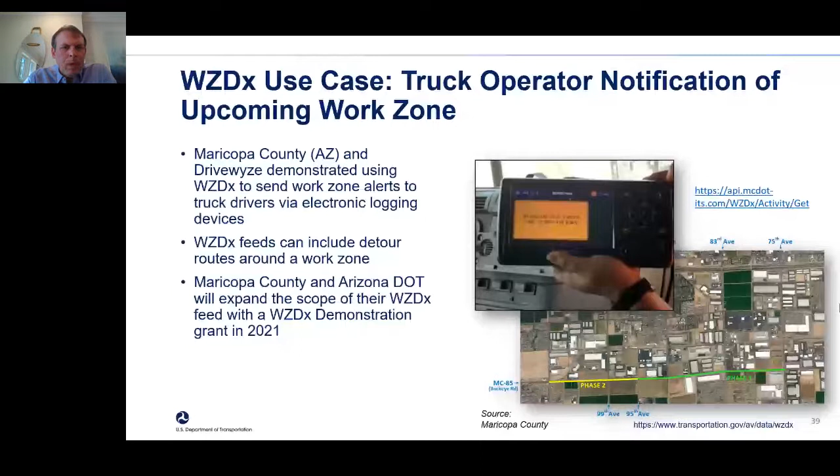And then I also wanted to talk briefly about an open source tool. You may have heard about it from other folks that was funded by Federal Highway to basically automatically generate WZDx data feeds in a work zone. You input some basic information by drawing a line in Google Maps using the tool, or Azure Maps. And then either with an Android device or a GPS-enabled laptop, you drive through it. It automatically snaps the work zone to the map and generates a WZDx feed as well as a roadside safety message feed for those work zones.

It's currently in testing by a bunch of different states. And we look forward to kind of wider spread deployment of that as an easy way to get your WZDx, more real-time data out there in the world. Next slide, please. All right, and this is my second to last slide.

So I urge you to get involved if you're not already. You can join the Work Zone Data Working Group. We have a semi-annual meeting. Obviously, we meet twice a year. It's on November 2nd, so in a couple weeks, from noon to 2:30 Eastern, where we kind of review what the latest progress of each of the working groups is and kind of plan the next 6 to 9 months. Send me an email, I'm avdx@dot.gov. You can join one of those 5 working groups.

If you have a specific interest in one or more of those areas that I mentioned, or you're interested in kind of starting a new area of related work, we're open. You know, this is a community-driven effort. This is not a USDOT-driven effort, and so we encourage you to kind of step in and participate as you will. You're the ones who kind of do the work and keep this going. And we encourage you to get on the GitHub site, which is where all of the specific development of the spec happens. Ask questions, submit an issue, something you'd like to see changed or added to the spec, and share your knowledge with the community.

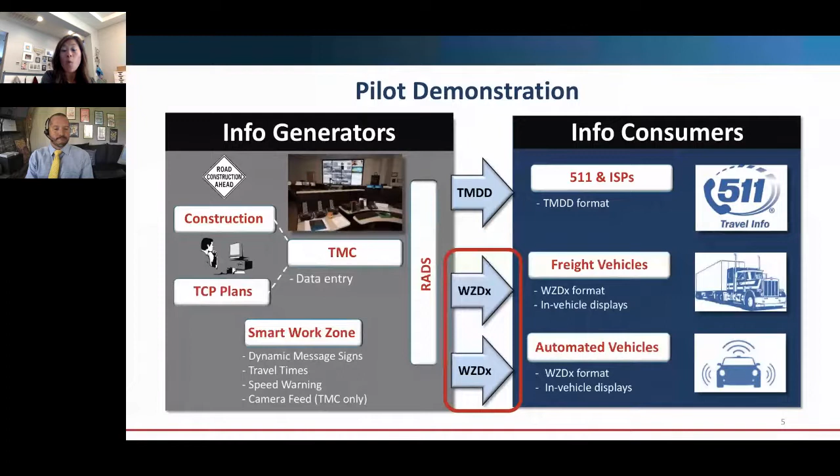We really think that data is very valuable and something that only the local agencies and the state agencies can provide, and is not available to the bigger companies like Google or Waze. So we definitely have a lot of value in that information. So we accept it in all forms, and we didn't want these agencies to have to change their processes because they honestly probably didn't have the resources to do that. And we didn't want to push a certain application.

So throughout, you'll just hear us talk about accepting any data we can and work with it as best as we can. We process it through our regional archive data system, RADS, that's backed by our AZTech partnership. So that's a really key component as we move forward with our work zone data exchange program and projects.

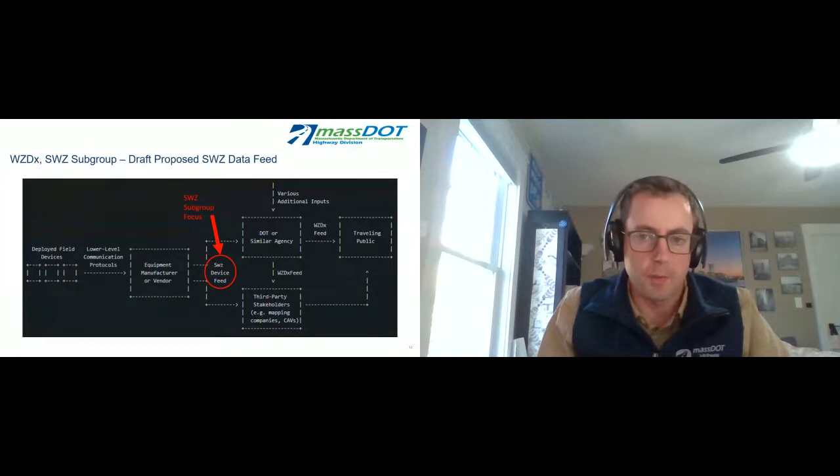So where do we stand right now? This is just a quick milestone timeline. So we started back in July 2021. This is when we presented MassDOT's existing Smart Work Zone API to the subgroup members, and we got lots of feedback from them, and we got a lot of good recommendations. So we started implementing these recommendations back in August of 2021, and then continued to work with subgroup members to iron out some issues in September.

And right now, in mid-October at this point, we're doing a QA/QC of the new API, and actually beginning discussions of how we're going to incorporate the new specification into the existing Work Zone Data Exchange specification. And in November, we have to do a big update at the semi-annual Work Zone Data Working Group meeting. And then finally, in December 2021, we hope to kick off round 2.

So speaking of round 2, which kicks off in December 2021, we're not able to cover everything in the first go around. We only had those 7 devices that we were able to get API specifications for. So there's much more to do. So here's just a short list of a few of the items that were not addressed in the first go around that we hope to approach in the second go around.

So we are always looking for more input. If you have any ideas or recommendations, we'd love to hear them and have you join our subgroup. So if there's any interest, you can just email Nate or Michelle. Michelle's from IBI Group, which is the group that's helping us write the specification. You can just email one of those two, and we're happy to get you aboard.

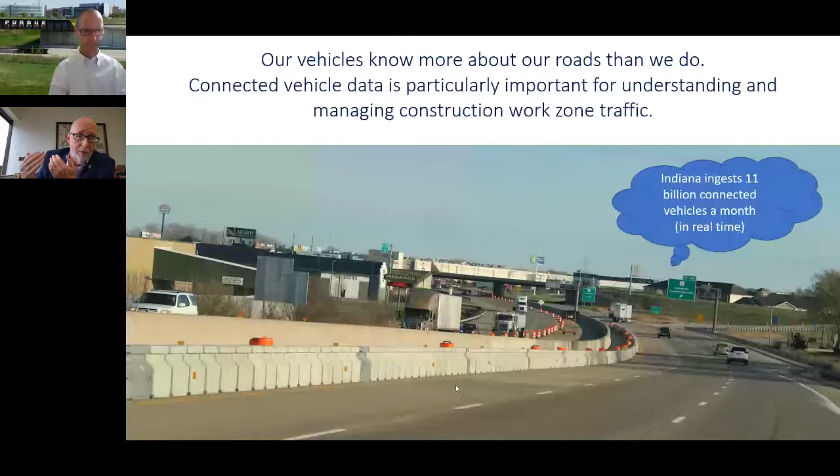And the idea of a queue truck is to have a vehicle that, again, moves with the queue as it shrinks or grows. We actually put them out in Indiana in pairs so that they can leapfrog one another as traffic changes and there's no one backing up on the shoulder. But they are manned with an attenuator. They're manned with specific, special, bright paint and strobes and lighting, unlike other warning devices that are out there. They can be seen on a flat road.

They can be seen. I swear to you, I talked to somebody in Darcy today who said they came on one of these jobs just over the weekend and they saw it about 5 miles away. So they are very effective in catching the eye and in getting the driver engaged, which, as we know, is a continual problem in just engaging the alertness of the driver.

Excellent context, Richard. And I think Richard kind of highlighted message boards, warning signs, but they have a really good strobe package on it. So Richard, I don't doubt that 5 miles. I've driven I-70 a lot lately, and some of those peaks and valleys, you can really see it a lot.

And then the other, we'll jump a little bit ahead to this, but we've actually broadened. Initially, we were just using the Haas Alert for injecting digital alerts into Waze and so on, but we've actually broadened the participation. iCones has a system, and there's a couple others out there. So I'll dive in a little bit more detail on that. So the topics and the motivation that we're gonna talk through is I'm gonna show you some examples.

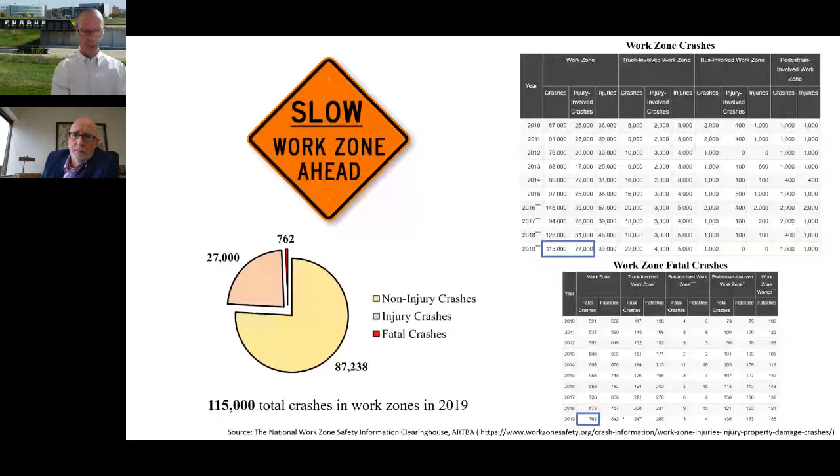Just for context, in terms of work zone crashes, I don't have 2020 data, and 2020 data probably will be a little squirrely, but we have somewhere north of 100,000 crashes a year in work zones, and somewhere north of 700 fatal crashes. And a large proportion of those involve not just the workers in the work zone, but the traveling public. And that's the message that Richard alluded to at the beginning of the talk with Governor Holcomb and Commissioner McGuinness, saying, let's come together and work together to improve the safety on Indiana highways.

And when you start looking at crashes in work zones, the insurance industry has known this correlation between hard braking and crashes for a number of years. That's why you're starting to see many of the insurance providers give people credit for putting in these dongles in their vehicles that monitor their driving habits.

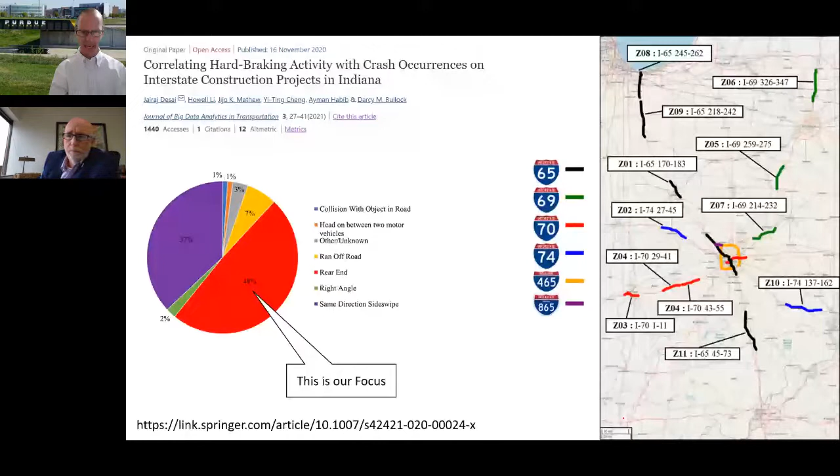But we looked at the rear end collisions in work zones in 2019, and we said, hey, can we do something to provide some advanced warning approaching a queue to a work zone, so that we don't get in that situation of real hard braking, as Richard said, that driver inattention. We got to wake the driver up. Interstates, particularly rural sections, can be a challenging section to keep drivers engaged.

Tennessee has been a very strong thought leader in this space, and if anybody's on the line from Tennessee, I just want to tell you guys thank you, because I think you inspired some incredible efforts that we Indiana colleagues have come along and adopted.

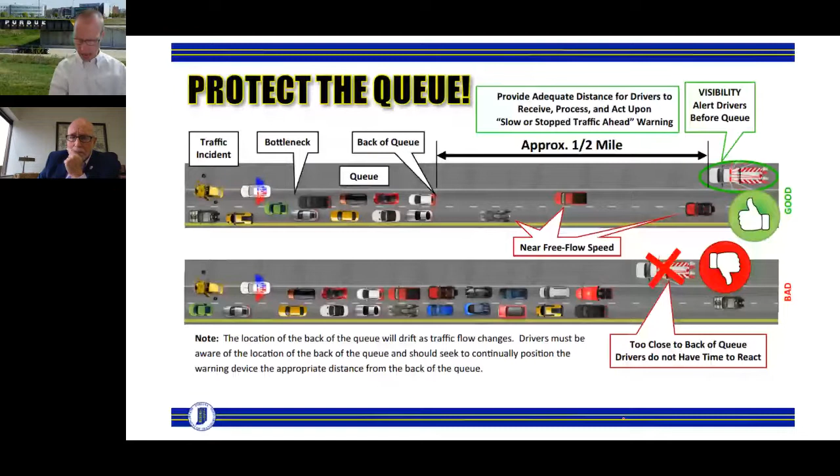So when we start looking at the work zones out there, I'm going to share with you specifics about the I-65 construction work zone. This area is nominally halfway between Chicago and Indianapolis. It's in the greater Lebanon area, if anybody's familiar with that.

Not really terribly important in terms of geographic area, other than we're in somewhat of a suburban rural area where there's an opportunity for somewhat inattentive driving. And I'm going to show you a 10-mile stretch from mile marker 130 to 150. Actually, it's the southbound direction, so mile marker 150 to 130. So this is two 10-mile sections, or 20 miles.

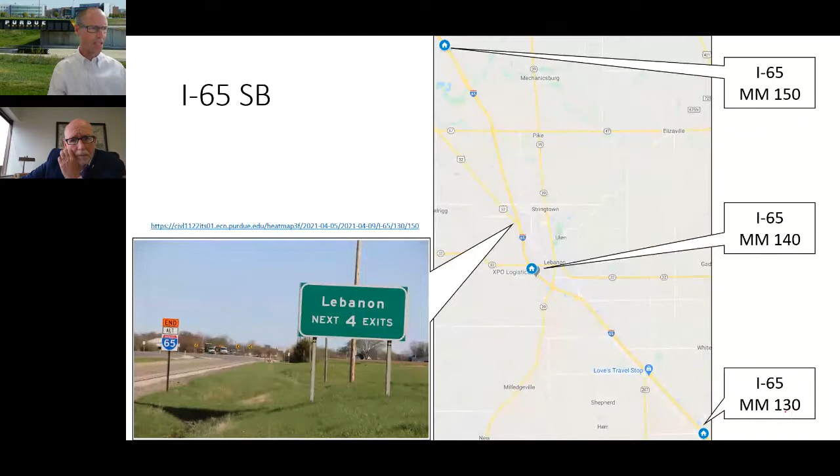And again, I don't need to tell this audience mile markers, but Richard and I share this talk many times with the general public, just reminding them where they are. And I'm going to call out the mile markers. This is 145.8, approaching the work zone. You can see some of the orange barrels. And you can see as we're getting into the work zone, this is actually just prior to queuing starting, but you can kind of see that this is an area where there is going to be some congestion and some queuing.

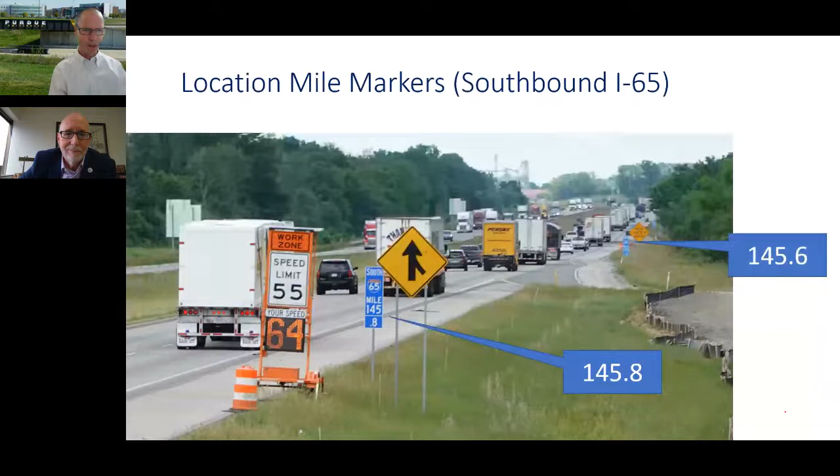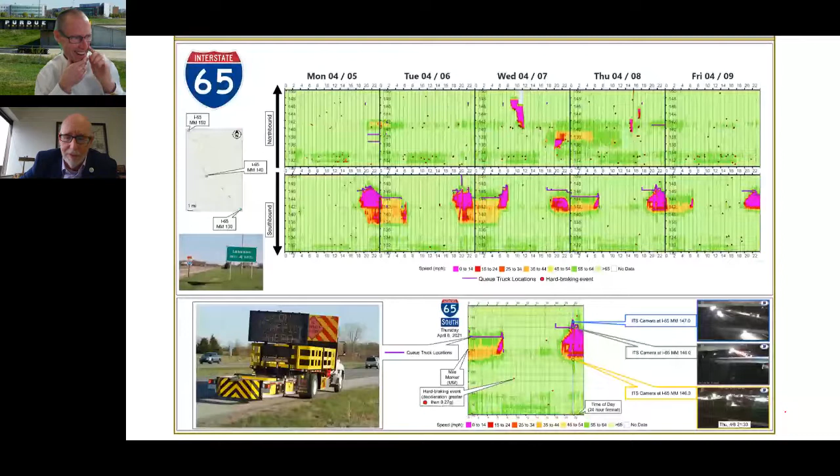I will say, Darcy, that when my members were charged with adding queue trucks, actually putting people as the first line of defense with the traveling public, there was quite a bit of hesitation. But when Darcy was able to come back with empirical data after a pilot program to show an 80% reduction in hard braking, our people had to kind of throw up their hands and say, well, I guess we're going to do this.

We already had a question, in fact, Darcy, on automated queue trucks, and we are aware of the existence of those entities, but we're still relatively in our infancy, and frankly, I don't know that our people want to go to the cost of buying a fleet of automated vehicles, unless the DOT wanted to do that on their own, and then I'd say go for it. And I'll add, Richard, we're all in on doing an evaluation if some other state wants to do it too.

Good dialogue. So what I want you to read on these heat maps: I talked about the Lebanon construction zone from mile marker 150 down to 130. And so this heat map is showing mile marker 150 to 130. So I'm showing you 20 miles of interstate in the southbound direction. And across the bottom are time ticks, 2 a.m., 4 a.m., 6 a.m., 8 a.m., 10 a.m., all the way through midnight. And along the bottom, and this is the whole key to reading this, green is good, red is bad. Reds and purples are bad.

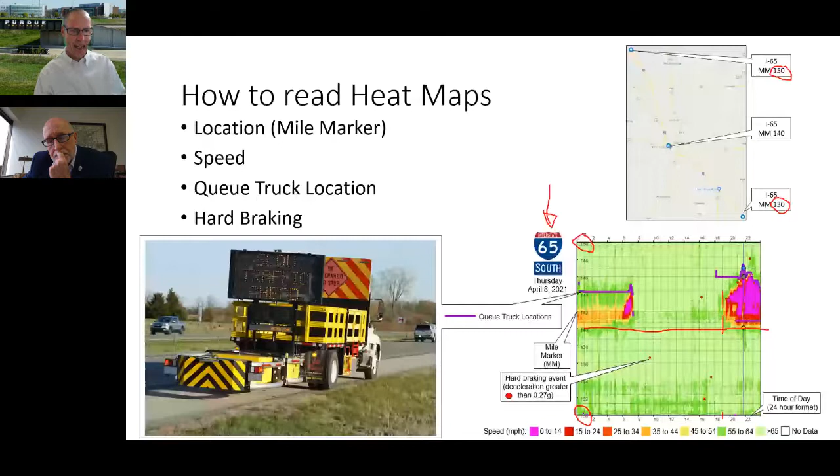And all of these queue trucks have telematics on them. So this purple line shows early deployment. They're upstream before the queue started, and then the queue starts. They follow the back of the queue, and then we can look at the queuing pattern over Monday, Tuesday, Wednesday, and Thursday, and you can see a repetitive pattern. About 7 p.m. is when the queuing starts out there. And we may have varying conditions.

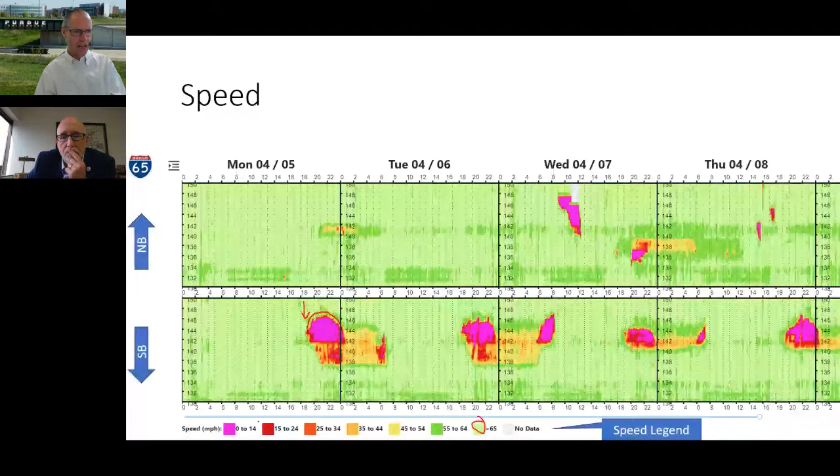And what we're really worried about right here is this back of queue. We're worried about the drivers coming in and having to change abruptly from 65 miles an hour down to 0 to 14. So what we do is we overlay on this hard braking. These are the other events that we get from connected vehicle data. All the speed data has been coming in, and we've been doing this maybe for 10 years here in Indiana. Certainly the Northeast states, I-95 corridor, you guys have been looking at speed profiles versus time on interstates for a number of years.

But the other thing we've done is we've brought in these red dots, which are these hard braking events. And now I'm going to dive in a little more detail on that. So the thing that's kind of remarkable, I'm just going to toggle back and forth. These purple lines are where the queue trucks are.

You can just compare and contrast. Here we had an unplanned incident and we see 9 hard braking events. But look here, over an entire evening, just 2 hard braking events.

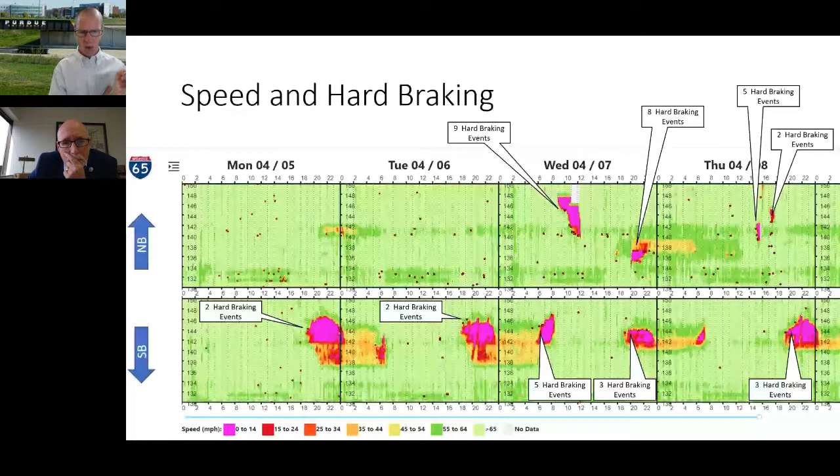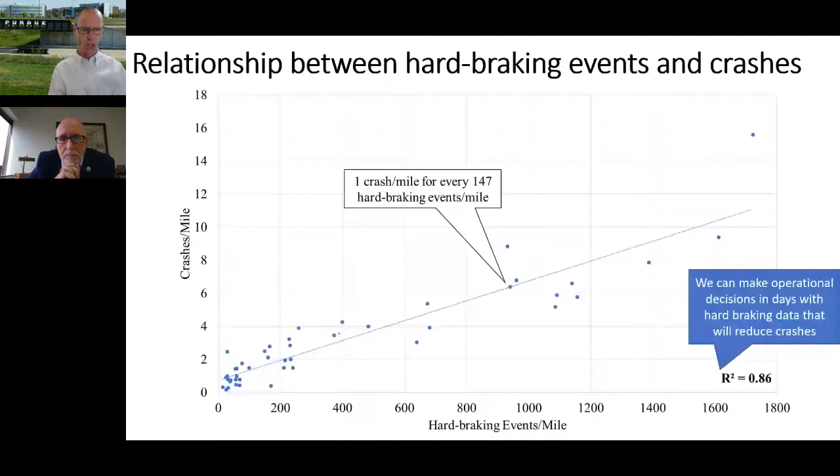The question we went into this with is, we know that hard braking events are highly correlated with crashes. The insurance industry has shown us that. We did our own study in 2019 and found about 1 crash at the back of a queue in a work zone for every 147 hard braking events. So our central performance measure going into this is, can we reduce those hard braking events? Because if we can reduce the hard braking events, we can reduce the number of crashes.

I'm going to show you just one corridor with a couple examples, and then I'm going to roll up several hundred hours of analysis.

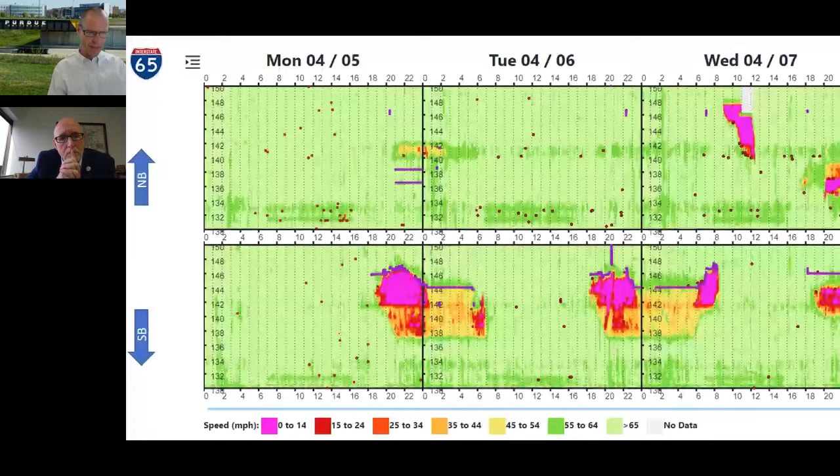When you compare these two work zones, these queuing conditions, this location had 2 hard braking events, and that purple line indicates a queue truck is there. Over here, we had 9 hard braking events in 3 hours. Here we had 2 hard braking events in 5 hours.

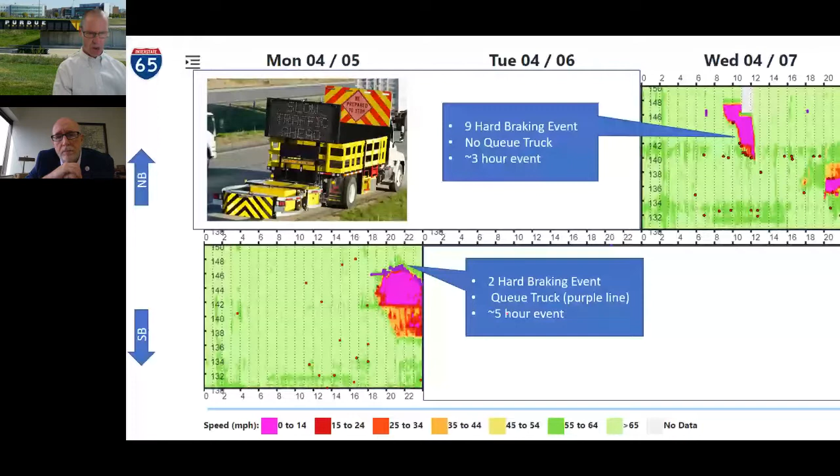Now let me show you a bit more of an example of where this might come into play, and then I want to loop back with a summary of how this can work beyond work zones.

We also use this same concept with what we call Hoosier Helpers, or what some areas call, in Illinois, Minutemen or Motorist Assistance Patrol. We put some digital alerts in.

We looked at 2 different events on I-65, one on May 26th and another on May 27th, both at the same time of day. On May 26th, we had 3 hard braking events over about 6 hours. Over here, we had 29 hard braking events when we didn't have a queue truck present. So in that particular case, it's maybe an 80 to 90% reduction.

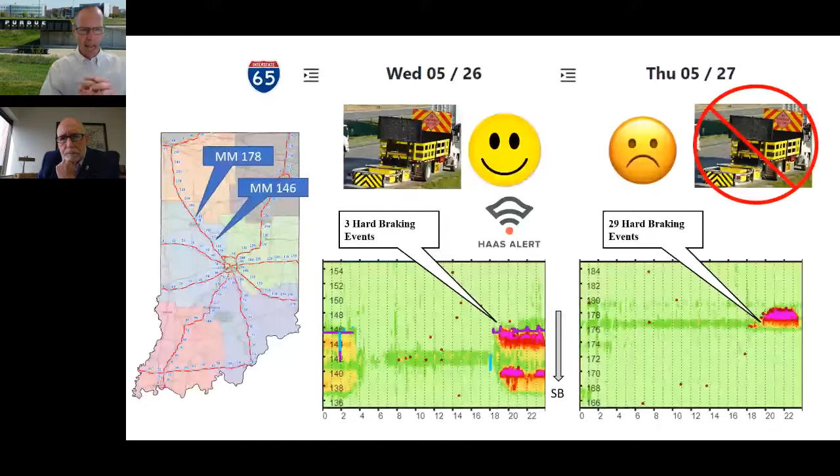Richard, maybe any color commentary before I give a little example on I-70 I was going to share? I thought it might be good for you to add a comment or two here.

I think it's significant enough that our people—we had an opportunity last summer on a very long stretch with several contracts associated with it—to do almost a laboratory of different traffic management devices and see what worked best in combination with other things. It was queue trucks, intelligent systems, and the presence of blue lights, whether through the state police or local law enforcement. Mixing and matching those things will be unique to every job; every job is going to be different, obviously. The fact that we have all these things now at our disposal, and more importantly now have the data to show where these things work best together, has been a great improvement for us.

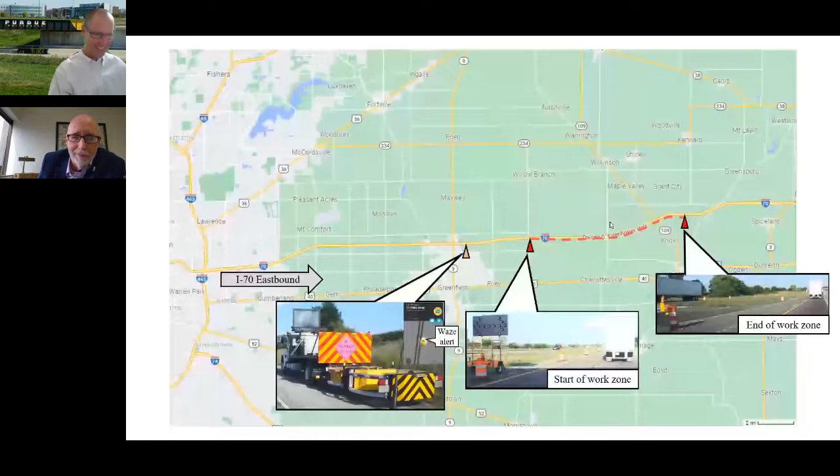So I'm going to show you, you made the comment, Richard, on being able to see these quite a distance apart. I'll show this so you can see with the naked eye, it's just a little speck there. I'm going to show you the GoPro image. This is August 29th at 5:54 p.m., the students are driving by the queue truck. The little moving map is an icon, and I'll tap it. As they went through, they had the Waze alert, they'd actually see that ahead of time, and that Waze alert was on. I'm showing you their position relative to the Waze alert.

Now watch the little timer down here, 21 seconds, as we're approaching the queue. They've joined the queue there 36 seconds after passing the truck. Your point is well taken, these trucks are highly visible. At 5 miles away it might be a curiosity to the uninformed eye, but certainly at 1 mile ahead, 1 minute ahead, you've got a very clear view of some bright strobes.

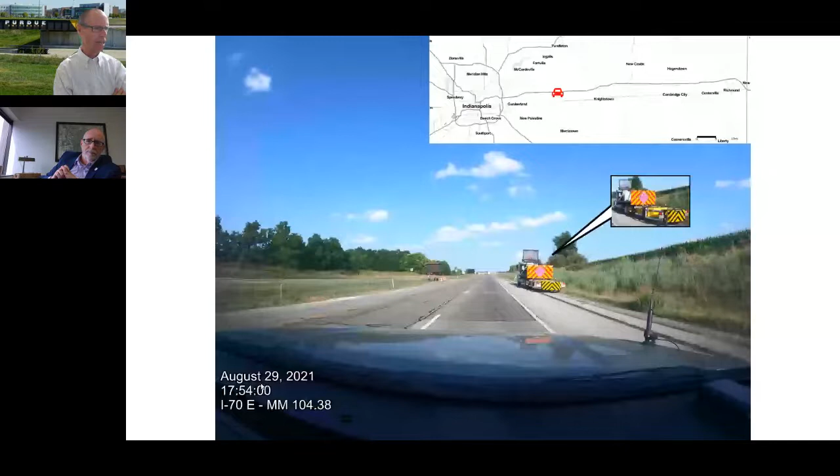We have the Waze alerts coming into the vehicles. This is the new frontier. I started this talk saying our cars know more about our infrastructure than we do. The other part of that equation is we've got to work collectively as a group to talk with the auto industry about how we systematically get these messages in a uniform way. We have the Manual on Uniform Traffic Control Devices for how we put out work zone signs, but there's no equivalent for how we get that into the car, and we really need to be looking at that. That's the thing we continue to try to wrap our brains around: we do so much as an industry visually to catch the driver's attention.

As we all know, there is so much competition within the cab of a vehicle for the driver's attention. If we can get inside that cab with something audio-related or on the screen that they're fixated with in their newer vehicles, that's the way to get the driver's attention - auditory and on the screens in the newer vehicles.

Could not agree with you more. The constituents we have here on the phone, I think it's good that we in Indiana are working in this space. But if we can start getting a few of our peer states together, the Federal Highway has a mechanism called the pool fund study mechanism - we've been very successful with that in other areas. That's something I'd toss out if people are interested in getting together with Indiana. I think we could get constituents together with INDOT to team with some states, because the auto industry doesn't want 50 different standards coming into the car. Google doesn't want 50 different standards. If we can start collectively getting together, we're all going to benefit - the state DOTs and the stakeholders that help provide that information into the vehicle.

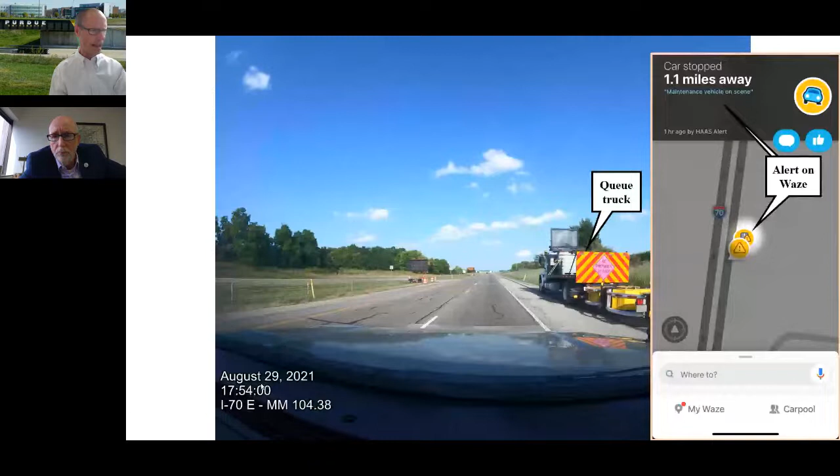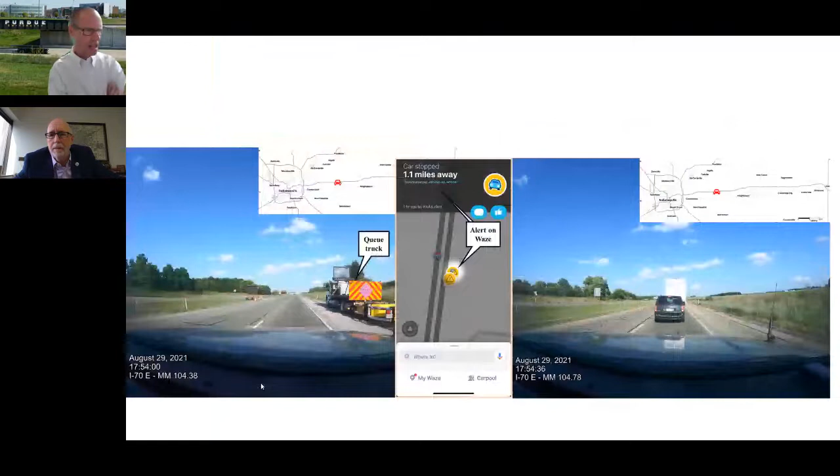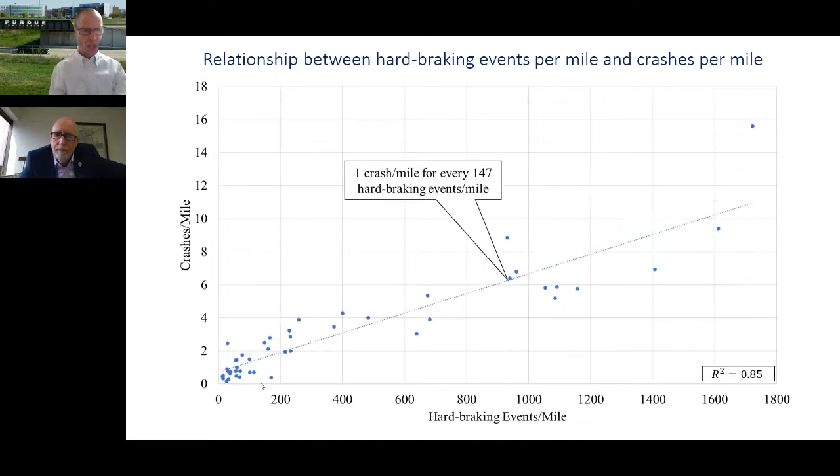So with that, I hope I summarized the concept of the queue truck and demonstrated there's very strong evidence. You don't just have to believe us - look at the insurance industry. They pay out real dollars on claims, and they place a high value on reducing hard braking events. If we can reduce our hard braking events by 80%, I'm going to go out on a limb and say we're going to go a long way towards reducing our crashes by 80%. The good thing about the hard braking data, as you saw from the plot I showed, is we can snap that down to a couple hundred feet.

If anybody's gone through crash reports, the public safety officers investigating crashes are first worried about safe management of the scene, making sure there are no additional injuries, getting emergency services in and out. Crash reports often don't get written up until after they're off the scene, and many times we don't get really good location data. So the other thing the hard braking and connected vehicle data gives us is really timely, actionable information. This data is coming in real time - we look at this every day, and once a week we put out a summary report to INDOT on this.

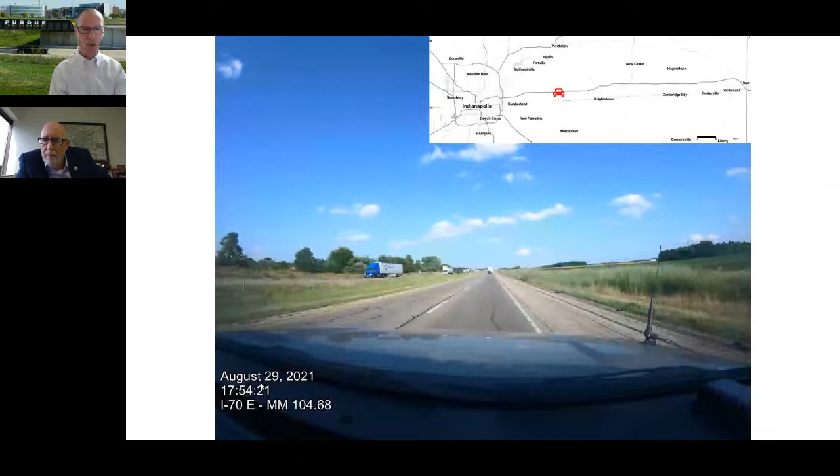Darcy, we've been asked: this seems like a great system for open highways, but how does it apply to an inner city highway where the road is winding between buildings and on and off ramps may only be like a quarter of a mile apart?

Yeah, that's a really good question. I would say, in terms of the analytics, one of the things that's often quite interesting in urban areas is you have closely spaced interchanges. By looking at the connected vehicle data, in urban areas one thing that can be helpful is closing interchanges so you don't have weaving close to a work zone. So maybe the queue trucks don't necessarily fit in an urban area, but I absolutely believe the connected vehicle data can be used to assess that.

And we've seen that on I-70 between Indianapolis and Richmond, they've actually closed some of those interchanges. So I'd say the connected vehicle data, either for identifying potential risks or monitoring how things might be operating - I'd a lot rather look at some hard braking events coming up rather than wait for a dozen crashes to pile up.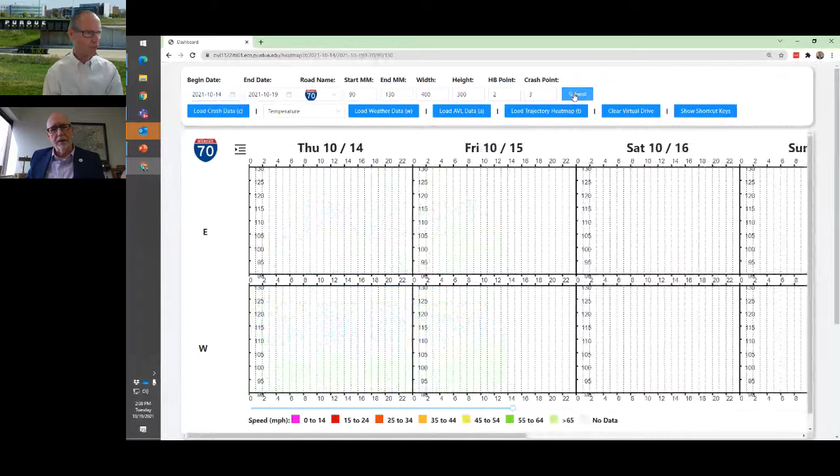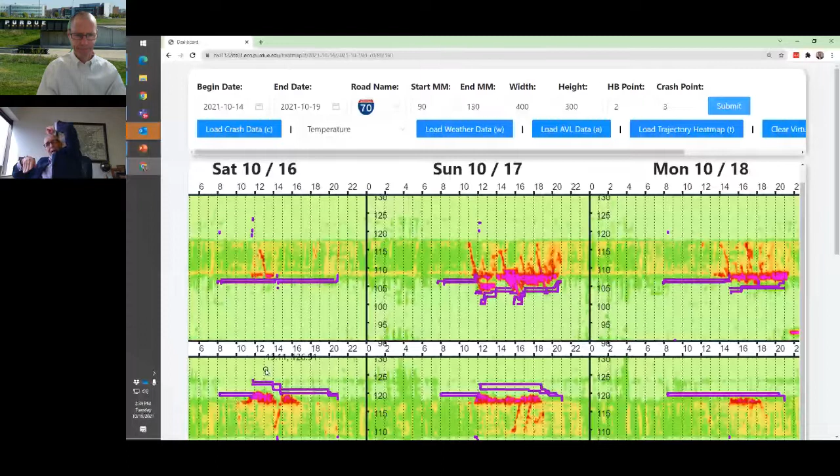And then I'm going to turn on the queue trucks, the purple lines. And you're absolutely right. We deploy them in pairs, and you can see that pair movement, and they work together as a team. So it's intuitive. You set up in your initial spot. As the queue grows and eventually surpasses that initial truck, the second one is deployed to come behind and establish itself, and then the original lead truck moves forward, takes the exit, loops back around, so it can then be the follow truck, again a leapfrog type situation.

Absolutely. As far as the decision-making criteria on when queue trucks are going to be used, just this week the gentleman I work with at INDOT provided us the list. I think there's going to be only 10 jobs next year that require queue trucks, and those are in the specs, the plans and the lettings that go out, so they know ahead of time whether it's a queue truck job or not. They base that on historical information, interstate only, length of the job, all those things they know from past history of where they anticipate large queues.

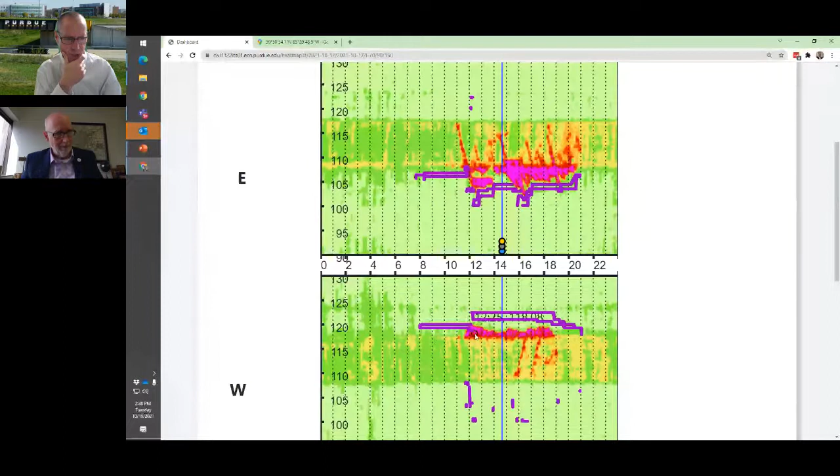Absolutely. And I was just showing you right there, there was one that got leapfrogged and swung back around. So I can't overstate how important it is that the queue truck driver is not the lowest person on the totem pole. You really want a team effort between the drivers. It's not just go out there and park beside the road. There is that active role, and that's where your constituents, Richard, have been so good at putting can-do people in the driver's seat.

So as Darcy said, we would love to eventually get to where we have some consistency within the industry, state to state, so that the messages coming through Waze and others are consistent, and the driver knows what to do when they see that consistent message. Darcy, you want to build on that? Yeah, and it really becomes important across state lines. I'll throw one last one.

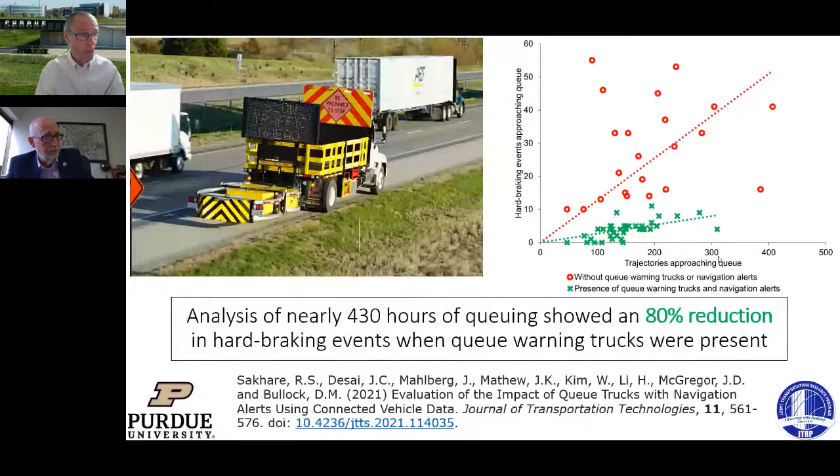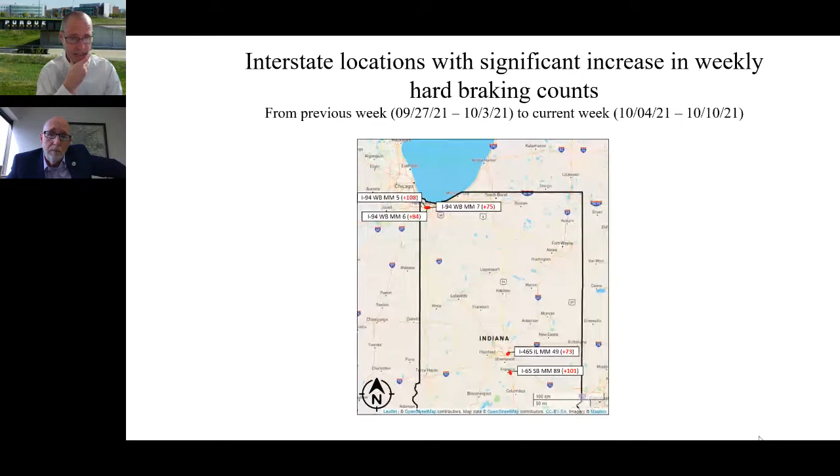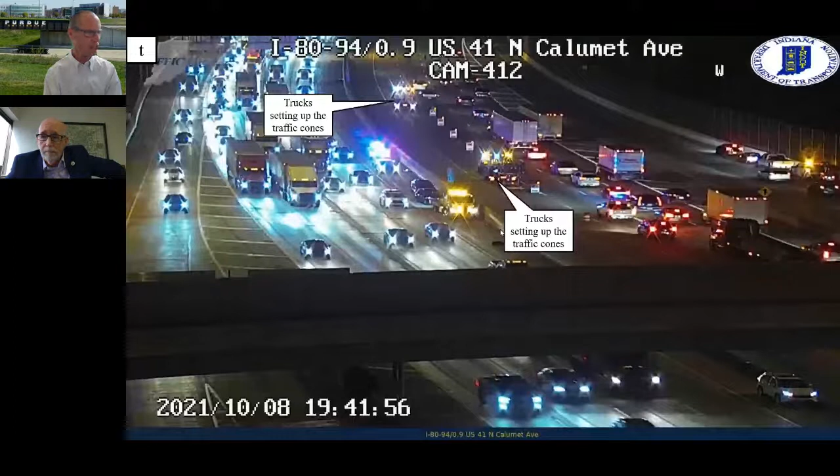We looked at the most hard brakings we had in the state for our work zone report last week, and 80/94 popped up, and this was actually a construction zone in Chicago, in Illinois, across the border. Richard, this probably makes your toenails curl when you look at all of those hard braking events. So not only is it consistency amongst states, but we have construction projects at the border, and the coordination and the messaging. We know how to coordinate on putting barricades in each other's states. But we've got a lot of work to do on how we start communicating

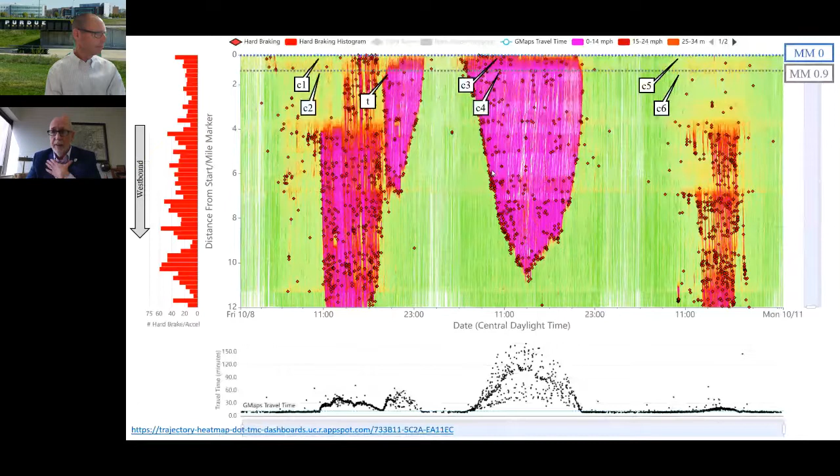Adam, responding to your point on putting a person in the role, we 100% agree with you. I don't like our people being the first line of defense. Automated Q trucks, yes, that's a possibility. I believe the eventual answer is going to be intelligent sign systems, done in relation with some of these Waze warnings. I have concerns from the human aspect and from the liability aspect. But we can't deny the effectiveness of these as the interim step to get to where we eventually want to go.

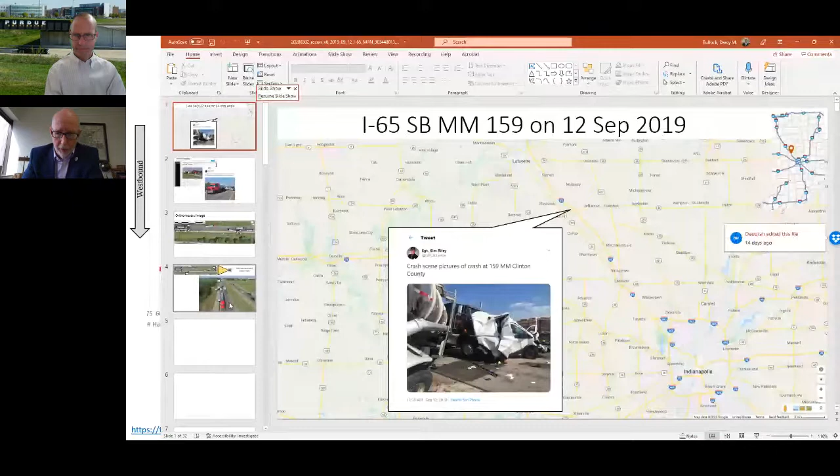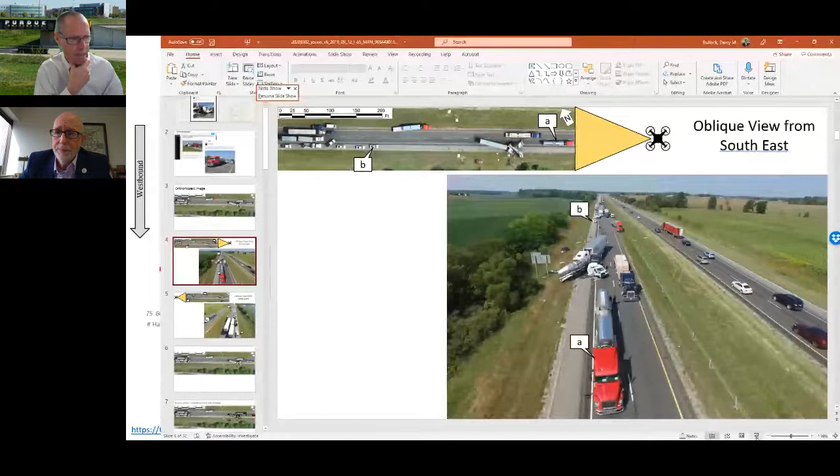Could not agree with you more, Richard. And this is absolutely a situation where we have balanced risk. This is a very sad story. I mean, we've got to make sure we look at that whole system. Zero risk for one person doesn't necessarily mean minimizing risk for the entire system.

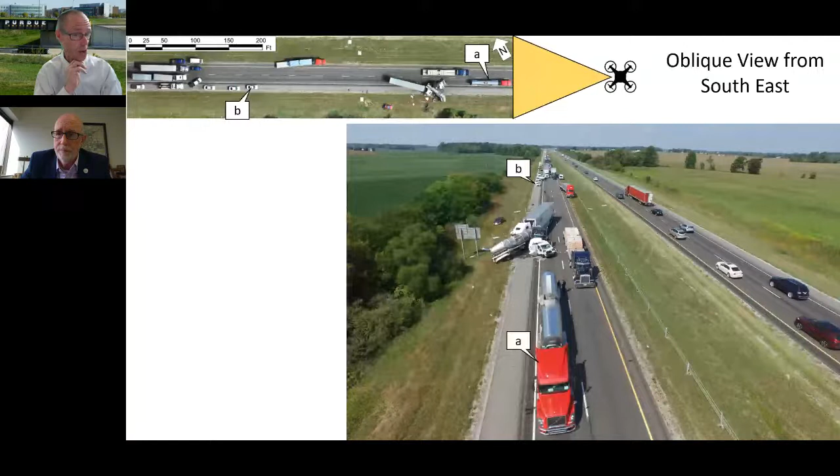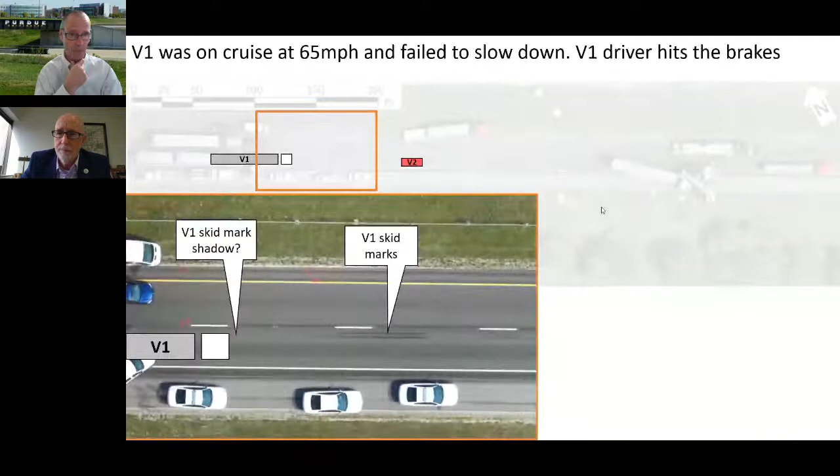And this is, as you're well aware, a very sad crash in Clinton County associated with a construction zone. We had an inattentive driver, V1, a tractor trailer, that came in and pushed one vehicle off, impacted a second tractor trailer, and then squashed the vehicles. And we had 2 fatalities in that vehicle that was stopped, doing everything right.

So anything we can do to kind of wake that driver up without creating undue risk for the construction workers is a balance problem we've got to work together on. You know, I have frustratingly been pushing automated speed enforcement in work zones here in Indiana. I know that there are now 7 states that do it at some level, and we continue to pursue legislation on that. But it's a hard slog.

It's very difficult for people to... they somehow feel a privacy issue is being breached by asking them to slow down from a camera rather than from an individual in a blue car. So I think all of these things are where we need to head. And I think that technology is going to help us get there. Technology has gotten us into this problem because that's what's distracting everyone. And so we have to use technology to get us out of this problem.

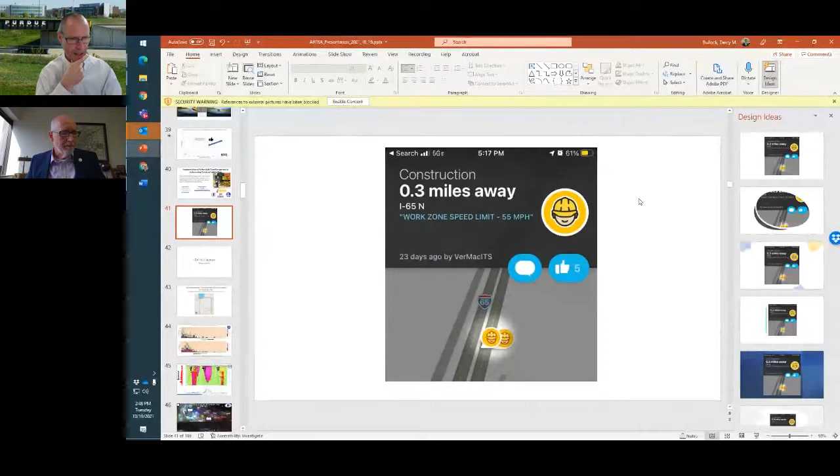All right, gentlemen. Richard, thank you very much. I'll go off script just a second. You made a comment about speed. You know, that's the other frontier on this. As we get into the changeable message signs and the speed limit signs, we've got to find ways to, you know, it might not be governing it, but if we can at least get with Google Maps and Apple so that the speed limit is updated on the Google map, that might be a first step. So I'm just looking for some of those baby steps before we get to the full solution.

As a wise university professor once told me, for every 10% increase in speed, there's a 21% increase in force. So going from a 45-mile-an-hour crash to a 65-mile-an-hour crash, that's where people die. You can have a crash at 45 and survive. You have a crash at 65 and you're not going to make it. Yep.